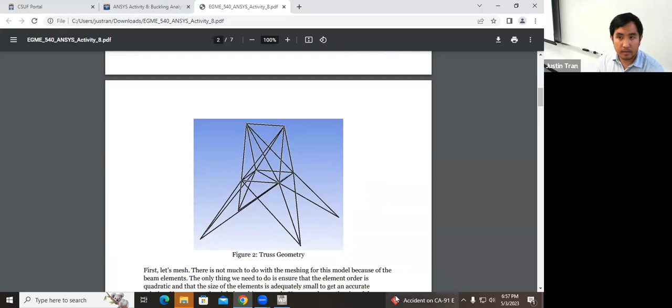Dr. Tran, if you're not in the middle of a discussion, can I ask a question? Sure. May you scroll down on your screen for assignment 8? Okay, I'll tell you when to stop. Keep on going, I just want to see the units. Show me the chart. Hang on. Sorry.

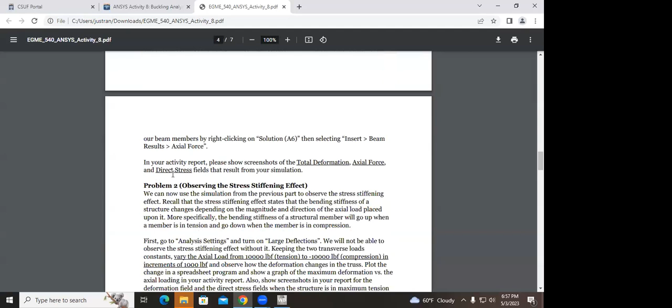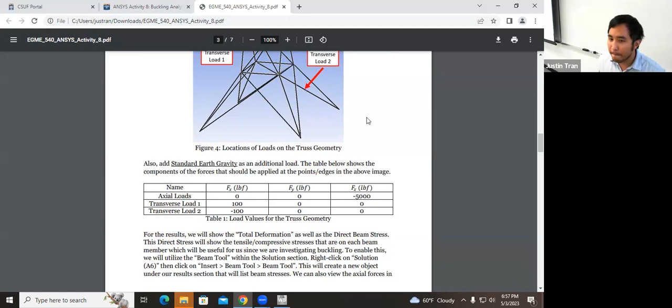So you're giving us, okay go up. You're giving us English units here, pound force. Do you want our submission to be in English units or SI units? Just be consistent. I gave it to you here in pound force just because I think that's the default for this geometry, but just be consistent throughout your report. It doesn't matter. Sounds good, thank you sir.

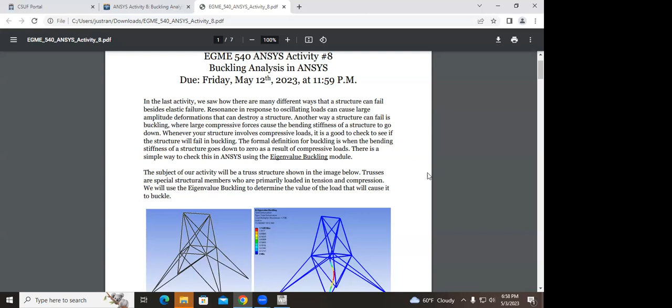Dr. Tran, I also want to say thank you for making the assignment due Friday instead of Wednesday. Oh sure, yeah, it's more doable. Oh yeah, yeah, I know it's a busy time, so I think having more flexibility is always a good thing.

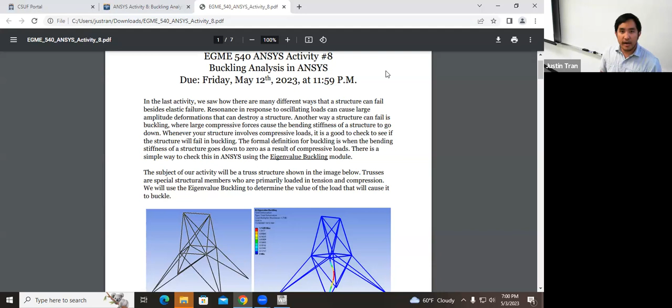So this is activity 8, the last one we're going to do together, the last time I'll be talking up here for the full time too. Just like I talked about on Monday, the plan for next week is that there's no plan. I know the final project is looming up very soon, so I wanted to dedicate the two class lectures for next week to be like a project workshop, or extended office hours if you want to think of it that way. So if you have questions on the final project, if you're having trouble with the simulation, or you have questions on how to apply one of these activities to the final project, that's the perfect time to ask.

I'm doing something similar for my other class too, 417. What I've been telling my students is that I know throughout the semester it's hard to start on these projects, kind of when we posted this a month ago. But I would really encourage you to at least get started on it before the class sessions next week, just so that you can come with questions.

After next week, I'll still have my office hours, so even during finals week I'll still have office hours. They'll probably be virtual, just because I live far from campus, but I do want to make myself available. But the best time to get a hold of me, where you'll have my undivided attention and I'll be there for sure, is in the lectures next week and in the regularly scheduled office hours. Definitely take advantage of that. So if you come to class with questions next week, I'll do my best to help you out. All right, so that's the plan for next week.

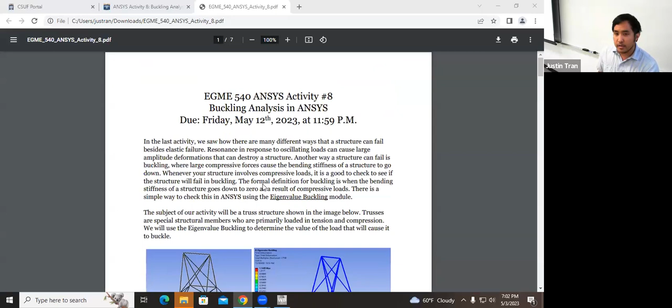Just like the normal procedure for the activity: go to the Canvas site, download the project instructions, download the CAD file, open up Workbench, and we can get started from there. Are there any questions I can answer about this activity, or the plan for next week, or anything in general before we start?

Okay, let's go and get started. Let me go ahead and open up Workbench.

Just like last week, our first step here is going to be a static structural analysis. Just like modal analysis, the eigenvalue buckling actually builds directly off static structural. So let's go ahead and take static structural and drag it to the workspace here.

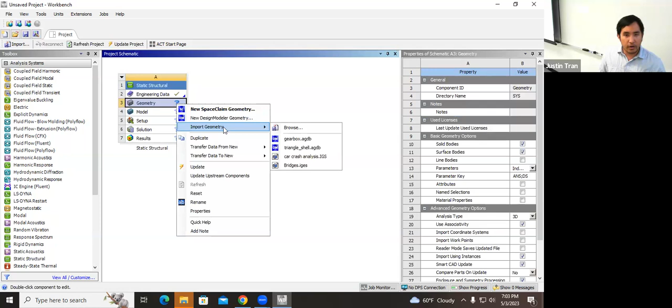We're going to import our geometry. So we're going to right click on geometry, go ahead and click browse, and we're going to download and import the 3D truss geometry that I uploaded onto Canvas.

I don't believe we're doing any change in material, so we're just going to stick with structural steel. Let's go ahead and double click on model right here and open up ANSYS mechanical.

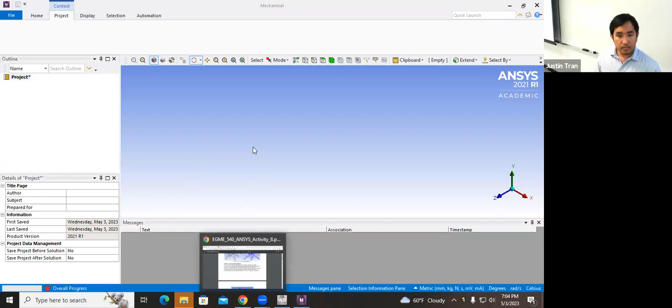When you open up ANSYS mechanical, you should be able to see the geometry. It may be a little bit hard to see, but the reason the geometry looks a little bit weird is because it's already been converted to beams. So what we have here is a collection of 1D beam elements, mostly just to keep the costs down.

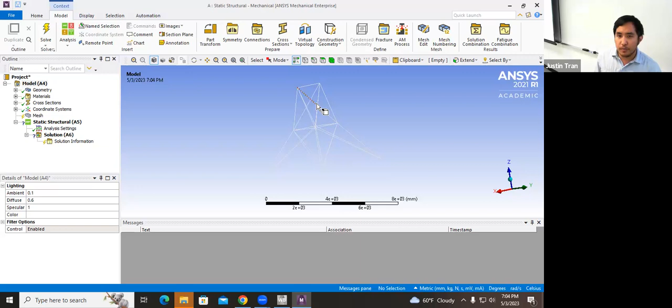And this is kind of the perfect geometry for beams too. Let me see if I can display it here. Oh, it doesn't even show. But if we were to show this, you would actually see a bunch of slender elements all kind of linked together like this. So this is kind of the quintessential beam example here.

So first thing we're going to do is we're going to mesh. We're not going to pay too much attention to the mesh here. The only thing we're going to make sure of is that we have quadratic elements. And for the element size, let me change the units here.

Let me go to English units, let's go to inches actually. And so let me make the element size here. Let's try an element size of 1 inch, and let's see how many elements that produces.

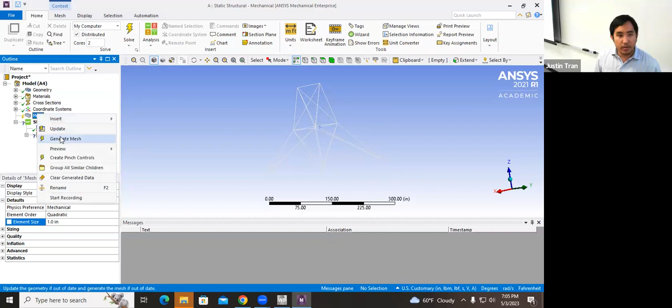We don't have to be too picky with the mesh here, we just have to get something decent. If you use an element size of 1 inch, you end up with about 3,000 elements. And I think in the project specifications, it says 5,000 elements is good. So let's go ahead and cut this down to 1/2 inch and let's see what that looks like.

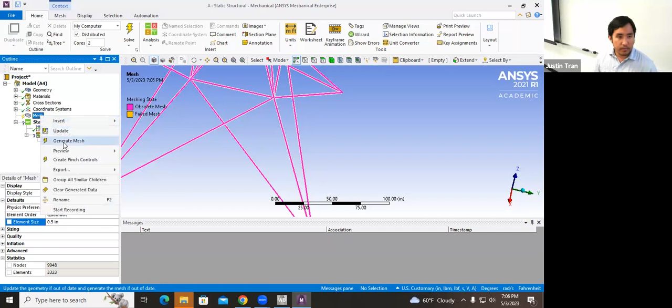With 1/2 inch, we have a number of elements of 6,000. So let's cut this down a bit more. Let's try 0.3 inches. And for a mesh size of 0.3 inches, we end up with 11,000 elements.

And that's plenty. You don't have to be too picky with the mesh here, as long as you're somewhere above 5,000 elements, I think you're going to be good. But if you want to follow along with me, I used a mesh size of 0.3 inches. Everyone is able to load this geometry and get a mesh on this.

All right, so far pretty straightforward. Hopefully that is good. So the next thing we're going to do is we're going to apply our loads and constraints.

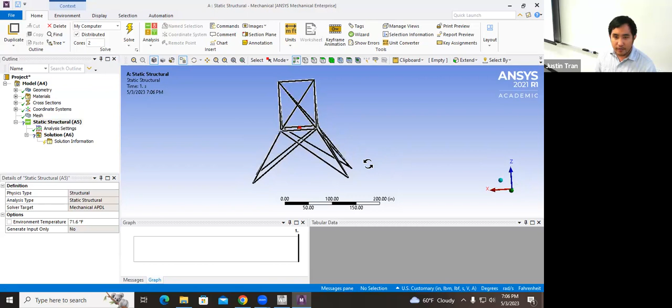If the geometry is a little bit unclear, basically what's happening is that this geometry is sitting like this, and the ground is down here. And so the first thing we're going to do is we're going to apply fixed supports.

We're going to apply fixed support on all 4 legs here, on the very bottom. So let's go ahead and insert our fixed support. And then I'm going to switch to vertex mode just to make it a little bit easier to click. And I'm going to click the bottoms of the 4 legs just like that. So now the geometry is fixed.

So now we're going to apply the loads. There are 3 loads that we're going to apply here. Let me see, okay, I think this is okay here. So let me go ahead and draw out the 3 loads that we're going to apply.

So the first load is actually a combined load, but I kind of lump them together because they both do the same thing. The first load that we're going to apply is a downward force on the very top of the structure. So this is load 1. If you're following along with the instructions, this is the axial load right here.

I'm not going to do that. I'm not going to write in serial killer handwriting, and so. Okay, so we'll call these load 1. Okay. So those 2 go together.

Okay. The next load that we're going to apply is on this element right here. Okay, so we're going to have another load that kind of goes horizontal just like that. Okay. So this is going to be transverse load 1. So this is going to be load number 2, I guess. Okay.

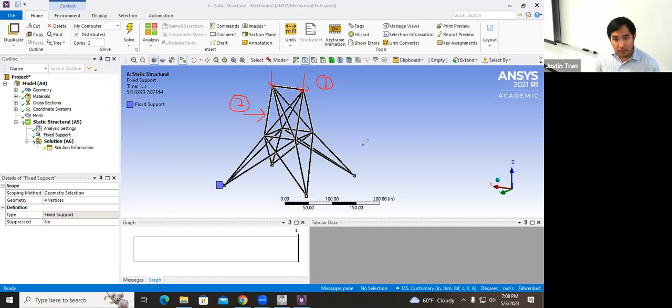Right. And then we're also going to have a load on this element right here, or this beam right here. Okay. It's a little bit hard to see, but I think the figure in the instructions makes it a little bit more clear. So that's going to be load number 3. Okay. All right, so those are the 3 loads.

And so the main thing to note here is that load 1, the 2 loads on top, this is going to put our structure in compression. Okay. And so that's going to be our main driving force for the buckling. Okay? And so it's going to be our main driving force for the stress stiffening. And then for loads 2 and 3, these are smaller loads that we're applying just on the sides to basically induce buckling.

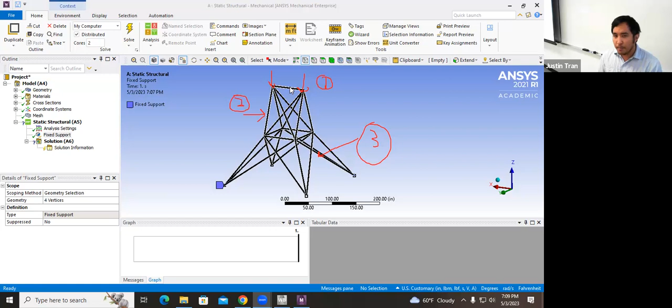So load 1, that's actually going to be the one that causes the bending stiffness of the beam to go down, just like we talked about on Monday. And the only reason we add loads 2 and 3 is just to make sure that we do actually observe buckling, because you do need to have some kind of bending force or transverse force in order to observe that.

Okay. So let's go ahead and apply this. I'm going to right click here and insert a force. Let's add the axial forces first. So I'm going to click on the top 2 points on the structure. Let's go ahead and apply. Okay. I'm going to change this to components, just so we can apply force in the Z direction.

And if you go off the instructions on the PDF, the magnitude and direction of that force is going to be minus 5,000 pounds. Okay. So this force right here, let's go ahead and rename it. So this is going to be our axial force. In other words, it's our compressive force. Either one is fine.

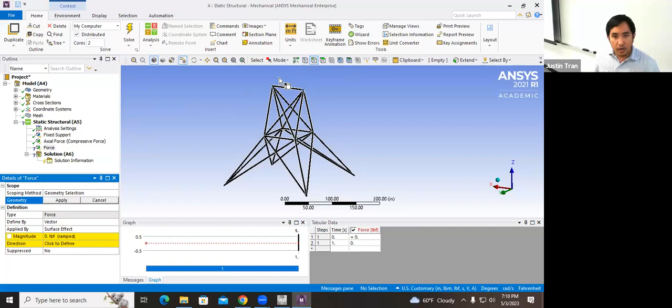Next, let's add in our 2 transverse forces. So we're going to add a transverse force. We're going to apply it to the entire beam right here, because it's hard to select just one point on that beam, because the whole beam is kind of one piece here. So I'm going to select this beam right here, and let's go ahead and change it to components.

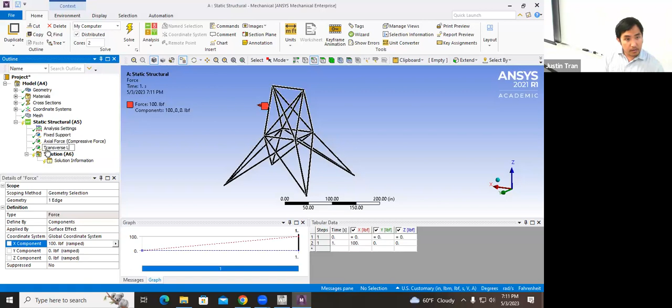All right. And so this will be transverse load 1. This is going to have a magnitude of 100 pounds. So let's go ahead and rename this. This will be transverse load 1. All right. And then let's go ahead and apply transverse load 2.

So let's go ahead and apply another force. And so this is going to be applied on this member right here. Okay. Great. Let's do components, and this one will be in the minus X direction, so minus 100. Okay. So this will be transverse load 2.

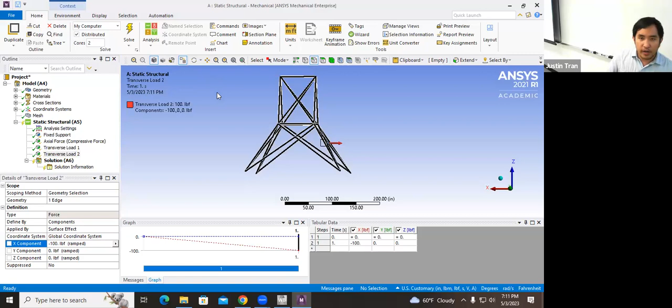Okay. So in total, you should have 4 boundary conditions. You should have the fixed support on the bottoms of the 4 legs. You should have the axial forces up top, that's our compressive force, and then our two transverse loads, one on the upper part of the structure, and then one on the bottom part of the structure. Okay. All right. Any questions on this?

Okay. All right. So for our results, let's go ahead and look at the total deformation. And then we're also going to turn on the beam tool. The beam tool is something special for a structure made of beams like this. What the beam tool will tell us is basically any kind of compressive or tensile stresses on the beam. So it basically shows the same thing as the equivalent stress, but it shows it as either a tensile or compressive stress on the beam, which is useful in this case.

Okay. And so to do that, we're going to right click on solution A6. We're going to go to insert, and then we're going to go down to beam tool, and then you're going to select beam tool. Right. So I have no idea why it's a menu when it's just one thing. Okay. And so let's go ahead and select that.

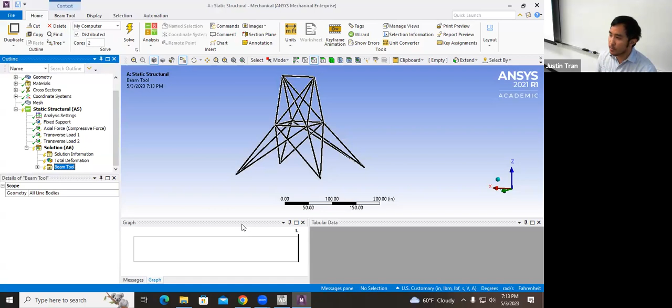Okay. Yeah. ANSYS will read which component of the beam. Exactly. Yes. And so because we've already converted these elements or these structures to beams, it already recognizes those as beams. But for a structure where part of it is beam, part of it's not, this will only apply to those beams. Okay. All right. And so let's go ahead and run this.

Okay, so we'll get our first preliminary simulation results. So you have the total deformation here, and if you're having trouble seeing this, right now it's a little bit hard to see because of all the elements here. That's what all these black outlines are. So we can get rid of those. If you want to get rid of those, you can go to results here and go to edges, and you can click on no wireframe. So that's how you would turn off the edges of the elements just to make it a little bit easier to see, right? And so for the total deformation, you should get a plot like this, okay?

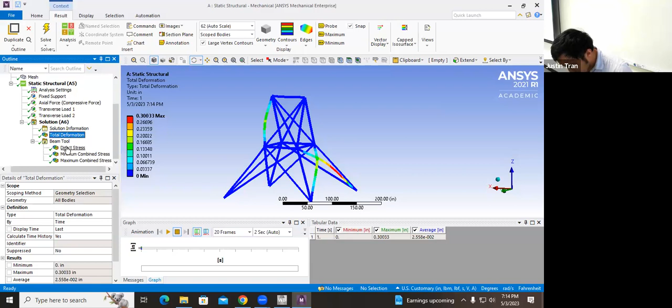And then under the beam tool, you can see here that we have a few results here, okay? Oh, let's do one more thing, actually, sorry. For one more result that we can show, just to make sure that we are seeing the axial results or axial forces, we can right click on solution A6, go to insert, go down to beam results, and then click on axial force. Okay, so let's go ahead and solve it one more time, just so we can see the axial forces.

Okay. And so for the axial forces, you can see which sections here are in compression and which ones are in tension. So for the axial force here, the way that you read these results, you can see here that we have both positive and negative results. For the results that are positive in red, those are the beams that are in tension. Typically for a tensile force or a tensile stress, we show it as a positive number.

And then for the results that are negative here, the ones that are dark blue, those are the elements that are in compression. Sorry. And so you can see here for all the dark blue beams, those are in compression with a load of about 1,000 pounds. Okay. Yellows are neutral. Yeah, yellows are almost neutral. So between yellow and green, those are almost no stress.

All right. So the main results that you should see here are the total deformation. Total deformation is of course important. The axial force is something that is useful. And then you can also look at the direct stress. Axial force and direct stress are basically the same thing. If you can see me switching between these, the colors aren't changing at all. It's just the units that it presents it to you with are different.

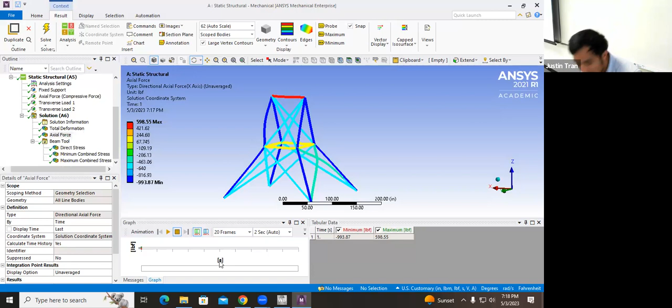Okay, so the first thing we're going to do is we need to enable the stress stiffening, and so you're basically going to go to analysis settings up here. Okay, and so under static structural A5, you can see here that there is basically a section here for analysis settings. Okay, and we need to turn on large deflections. Okay, and so when you go to analysis settings here and you go to nonlinear controls. Okay, actually, where is it? Let's see.

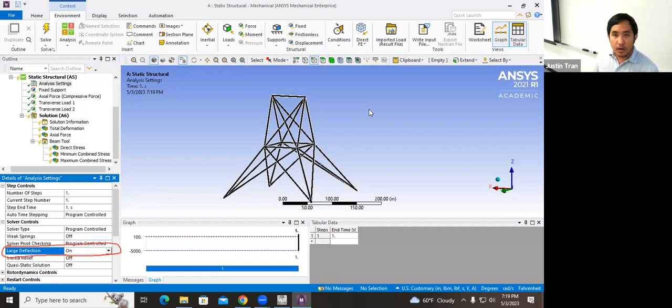Oh, right here. Okay, and so under analysis settings, if you go to solver controls, you can see here there's one setting called large deflections. Okay. And so by default, it's off, right? Because if you turn on large deflections, it increases the cost of the simulation. But without the large deflections on, we wouldn't be able to see kind of the stress stiffening effect. Okay, so let's go ahead and turn it on. And let's go ahead and rerun the simulation and see what effect that has on our results.

Okay, so with the large deflection turned on, it's a little bit subtle, but what you should see is that the deformation that you observe increased by almost about 10%. And so it used to be about 0.30 before, now it's about 0.32, okay? And essentially what's happening is that we're basically enabling all the nonlinear effects in this simulation, okay? Which normally, when you enable nonlinear effects, it's going to increase the cost of the simulation pretty significantly. But because we have a structure here of all beams, it's pretty cheap, okay?

Okay. And so you can see here that under the current configuration, we have a max total deformation of about 0.327, okay? And that's occurring here on this beam here, one of the beams that we applied our transverse stress, right? Let me show you something. So go ahead and memorize that 0.327. And what I'm going to do here is I'm going to increase the value of this axial force, okay? Because right now we're applying a compressive force of about 5,000 pounds. Let me double this so you can kind of see what's going to happen. Okay.

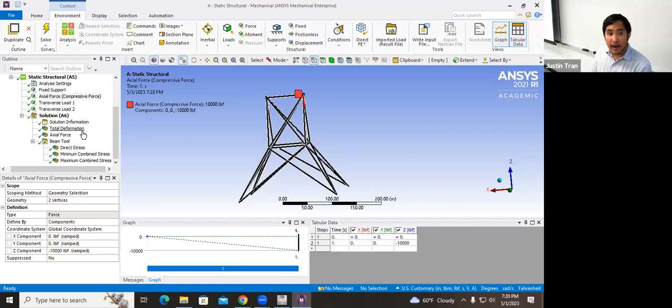Okay. And so I've doubled our compressive stress here. And so by our logic, since we're applying more compressive stress onto the structure, the structure should buckle more. Right? And so the deformation that we observe should be higher than it was before. And in fact, it is, right? So you can see here that when we basically double the amount of compressive force, the maximum deformation here increases to almost about 0.37. So it's a fairly significant difference.

Okay. All right. And so for this part of the activity, problem 2, it'll probably take you guys maybe 10, 15 minutes to gather all this data. I want you to basically create a line plot. Okay. And so I want you guys to create a line plot in Excel, where on the x-axis we have the axial force. And on the vertical axis, I want you to plot the deformation.

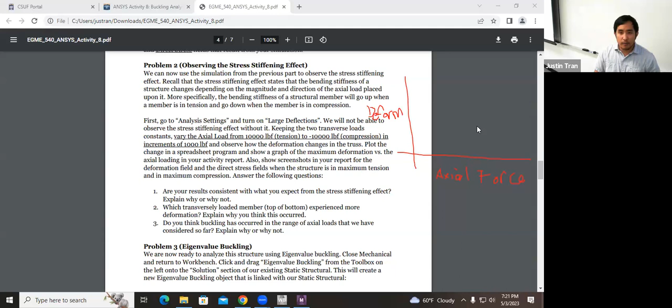And so for various values of the compressive force, I want you to basically change that axial load. And so I want you to go from basically minus 10,000 pounds to 10,000 pounds. And I want you to plot out what the maximum deformation is going to be. Okay. And what you should see, I can bring back the pen here. What you should see is that the trend line should kind of go down. Okay.

And so at minus 10,000, you should see a maximum of the compressive deformation. But then as you change that load to tensile, the deformation will go down because of that stress stiffening effect. And so you're going to have to use Excel to kind of plot this out, but I want you to change that axial force and plot it out just so that you can see. So you should have about 20 data points overall, because I want you to change it in increments of 1,000 pound force.

Any questions on that? Does that kind of make sense for everybody? Okay, so I'll give you guys maybe like 10, 15, 20 minutes to get all that data and plot it out. You can use Excel, you can use Google Sheets, it doesn't matter to me. You can even draw it by hand if you're confident in that. But why don't you go ahead and do that just so you can see the stress stiffening effect in action.

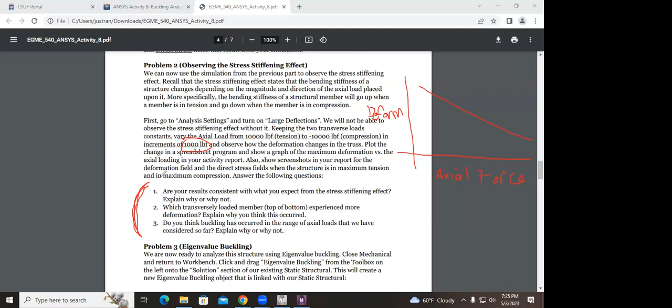And then also for this question here, you can see I have additional questions that you can answer, but you can save those for when you write up the report, so you don't have to answer them just yet. Professor? Wait a second. Oh, analysis settings. It is under static structural A5. This one right here. And then you want large deflections right here.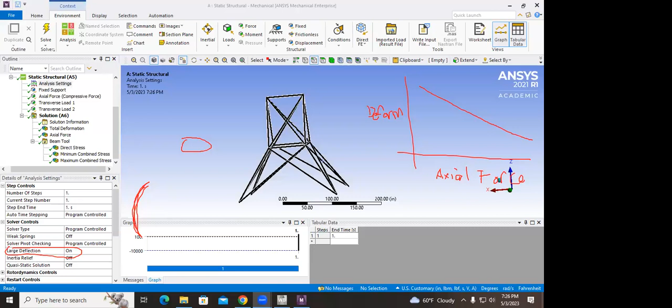Sorry, Chris, you were saying something? Yeah, I showed up a little late. Is it for the axial force and transverse load, is it just force? Yes, those are just forces. For the transverse, are we applying it to the beam or a point? The beam, the entire beam. Anywhere specifically on the beam? Just select the whole beam. I think you can only select the entire beam, so just like that.

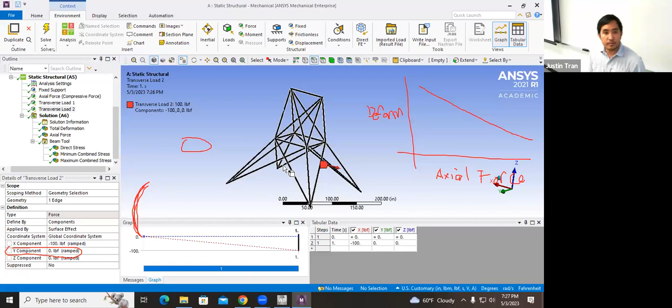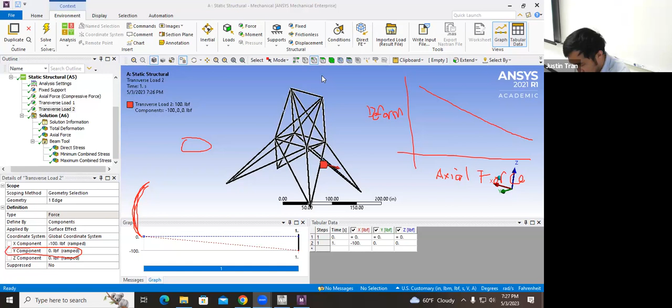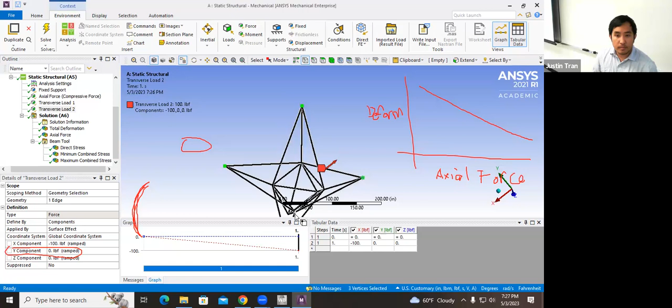Transverse load 2 location? Yeah, for transverse load 2, it's on one of the legs basically. So just somewhere on one of these legs on the bottom. Because there's so much symmetry in this structure, it doesn't matter too much which one you apply it on, but just one of those bottom legs. And where are we applying the fixed support? The base, those 4 points? Yeah, so basically all the bottoms of the legs. So all 4 of these points here. Yeah, those, oops, not that one.

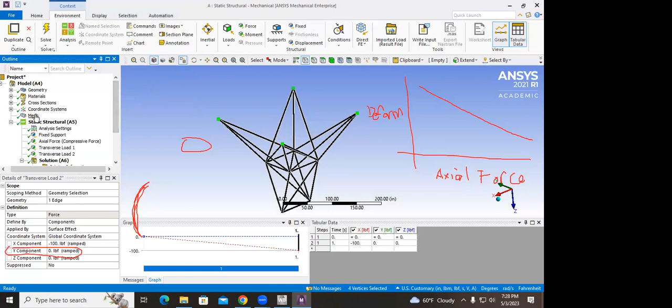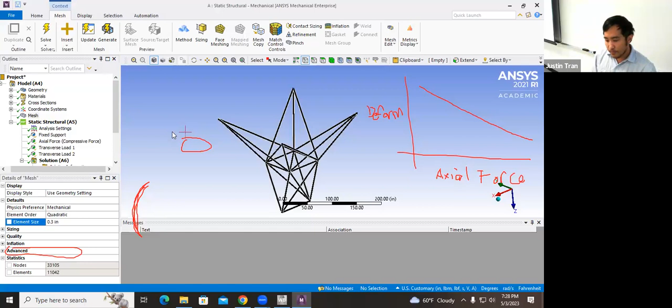And any specific requirements for meshing? The mesh, you don't have to be too careful with this one. Do you want a method and a sizing? No. Because here it says 7,500, what was it? 7,500 elements. So you can just change it by the global settings here. As long as the element order is quadratic under mesh, and I used an element size of 0.3 inches, but anything like 1 inch or 0.5 inches is fine. We don't need too big of a mesh here.

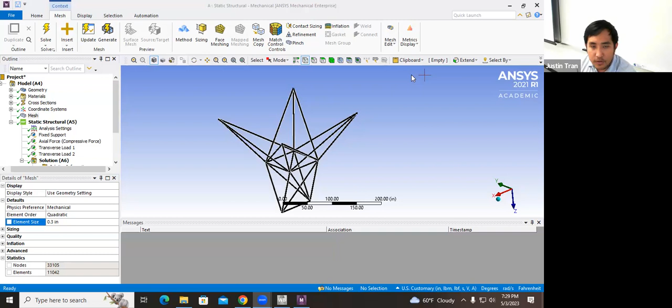All right, so how's everyone doing getting that plot? It's a lot of data points. Materials, structural steel? Yes. Anything specific about the geometry we need to worry about? No, everything is made of beams already, so it's already prepped for you. There's nothing too special with the material or geometry here.

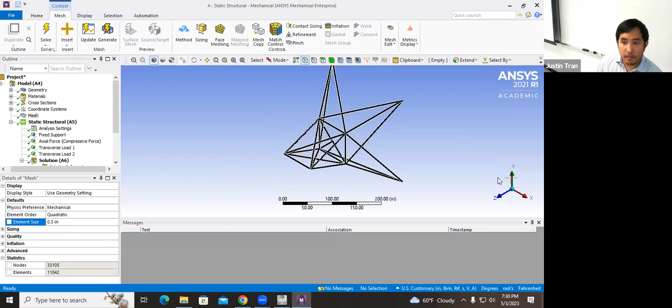Is there any way to get the display to put it right side up instead of all cattywampus? You can. I think the best way would be to use the coordinate axis here in the bottom right to click to set it to one thing, and then just rotate with your mouse to get it to a good position. Okay.

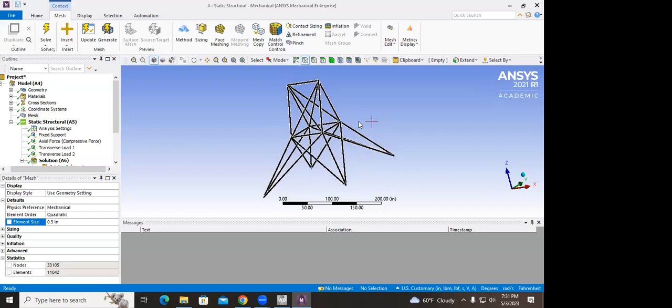Oh, Chris, there is one thing you have to do. Before you run the simulation, you're going to go to analysis settings here under static structural A5. And then there's a setting down here for large deflection, and you're going to want to turn that one on. Yeah, I heard that and forgot to do it. Okay. Yeah, just make sure you do that before you start doing problem 2.

If I fail to do that before I start, does it explode? Oh, no, it's fine. It just modifies the results a little bit. If you turn that off, it's going to assume that everything is linear, and so essentially it'll underestimate the deformations because buckling wouldn't be able to take place. So in order for you to observe buckling, you have to turn that large deflection on. Okay.

Since we can't do 0, do you want some low number? Oh, you can skip over 0. Yeah. It'd be a fairly linear graph. 0 is kind of right in between.

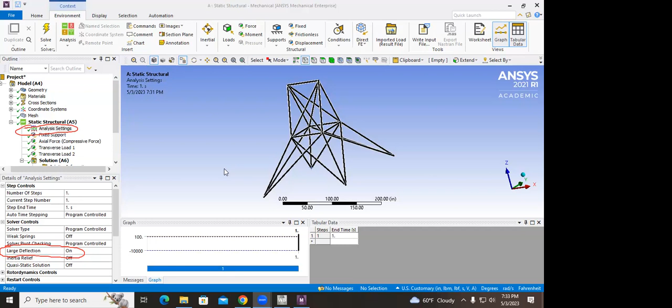I have a question. Sure. We're dropping one of the activities, right? Yes. The lowest one is dropped automatically. So if we've done 7 already, we can drop this one. Correct. Yeah, this one is one of the easier features though, and a lot of people end up using this one for their final project. So this just gives you practice for it. But in terms of your grade, if you did all the other activities and did well in them, then you don't have to do this one. It'll be dropped automatically.

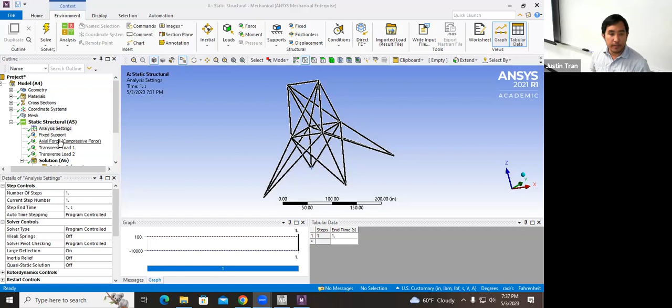All right. So that was buckling the hard way. I kind of made that a little bit painful on purpose, just so that you can see that normally it's very painful to do this kind of buckling analysis naively. So now I'm going to show you how to do buckling the easy way. We're basically going to use another analysis type, just like modal analysis. So we're going to need to close ANSYS Mechanical.

But before we do that, I want you guys to go to your axial force here and make sure that the force you're applying is compressive, okay? The actual value doesn't really matter too much. You just want to make sure that it's a negative number, like a negative 1,000 or a negative 100, because the next step that we're going to do depends on that being compressive.

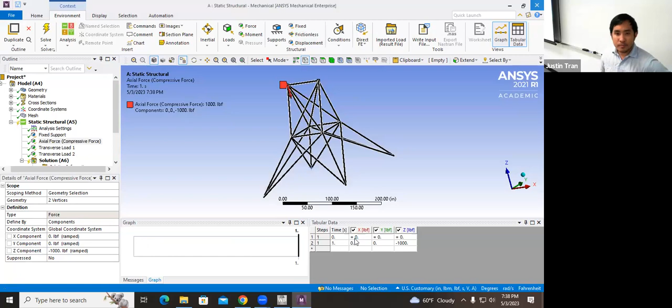I'll say it again, make sure your axial force here is compressive. Then once you do that, you can go ahead and close ANSYS Mechanical to bring you back to Workbench. Okay. Magnitude doesn't matter, as long as it's compressive.

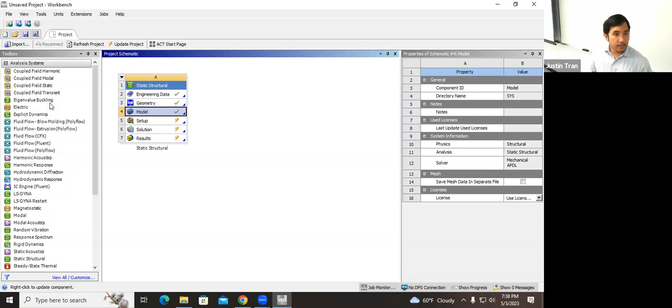Okay. After you've changed it, if you want to get rid of these lightning bolts, you can rerun the simulation, but it doesn't matter too much. The next thing we're going to do is take eigenvalue buckling. It's a different analysis type here from the toolbox. We're going to click and drag eigenvalue buckling, and drag it on top of solution, just like this, okay?

Because what we want to do is link the eigenvalue buckling to our static structural analysis, so it'll inherit all the boundary conditions and such.

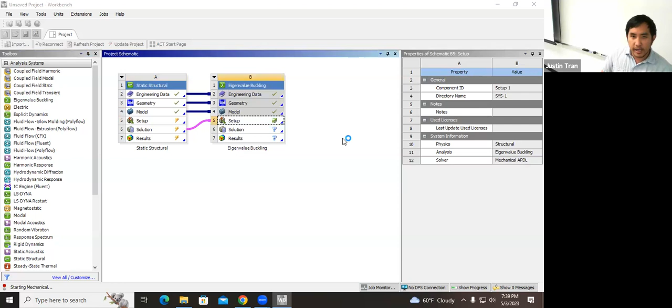After you click and drag eigenvalue buckling onto solution, it should look like this, and you should see the two are linked. It should have the same engineering data, the same geometry, the same model, and the same solution. Once you do that, you can double click on setup for eigenvalue buckling, and that'll open up ANSYS mechanical again.

So this is buckling the easy way. The nice thing about eigenvalue buckling is that it's really kind of a one button solution for buckling. So let's try just solving it as it is, without changing any settings, and let's see what it gives us.

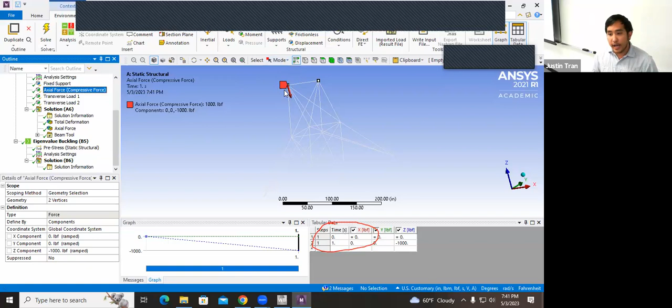Your multipliers are going to be different, and it really depends on what value you chose for your axial force. For me, I chose a force of 1,000 pounds going downwards into the model, and that gives me a load multiplier of about 14.135. If you look at the activity sheet, you can see the load multipliers there are a lot smaller. That's because I probably used a different load value there, and I don't remember what I put for that one.

So you can see here that it's showing us two modes. We can show more, and I think in the activity I asked you to show 6, so let's go ahead and do that. Under the eigenvalue buckling, there's another button for analysis settings, and one of the options there is the maximum modes to find. So let's increase this to 6, and then solve it again.

All right, and so with 6 modes, you can see here that we have six load multipliers here.

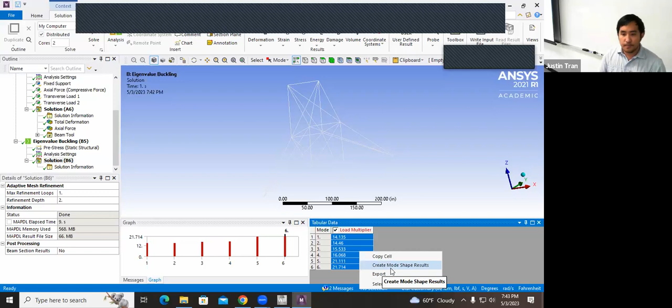The last thing I'll show you here is how to actually display these modes. Remember, the way ANSYS displays buckling is very similar to modal analysis, so when buckling occurs, ANSYS can give you a prediction of exactly how the buckling will occur or what it will look like. The way you can display that is by highlighting all the load multipliers, right clicking, and then clicking the button for create mode shape results. Let's go ahead and click that, and it's going to create 6 deformation fields for you. So let's show what that looks like.

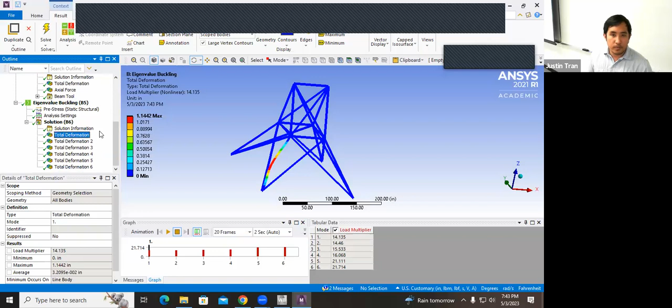You can click on each of the deformation modes and see how the buckling is going to occur. Under my arrangement with the way I have the forces, your transverse forces might be a little different, so your mode shapes might look a little different too. You can go to the different parts here and it'll show you which legs will basically buckle. So basically what this is telling you is that if this structure were to buckle, this leg right here would be the first one to go, the one that's going to collapse before all the others.

All right, and so that's it. That's buckling right there. You can see here, I had you start with buckling the hard way, but this is an easier way to do buckling. So if you want to do a quick and dirty analysis in terms of predicting whether buckling will occur, this is how you would do it. Any questions on this?

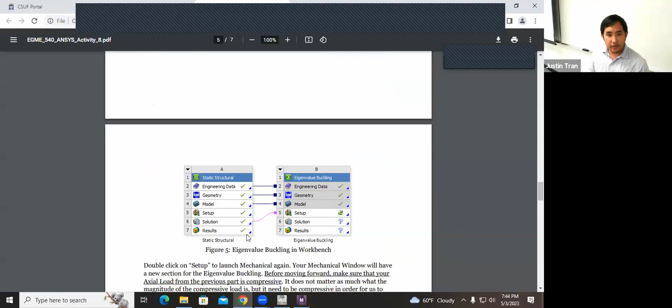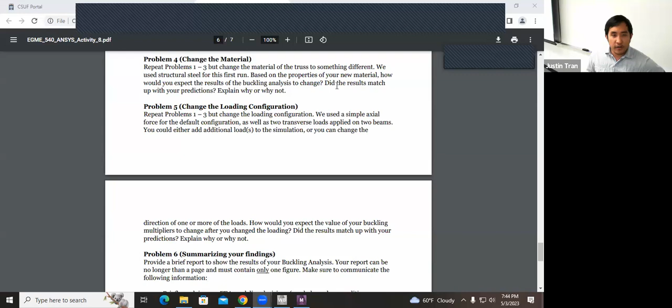Okay, so that's the activity. The rest of the activity here is I basically want you to repeat it. Problem 4 is going to have you change the material, and problem 5 is going to have you change the load configuration. But it can be pretty tedious to do both of these, so I'm going to make a change here where instead of doing both problem 4 or problem 5, you can choose either or. You have to do problems 1 through 3, which is what we did together just now.

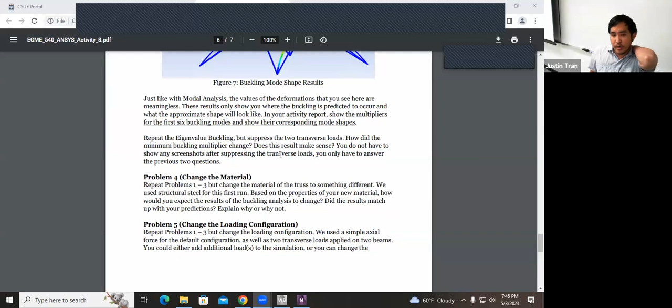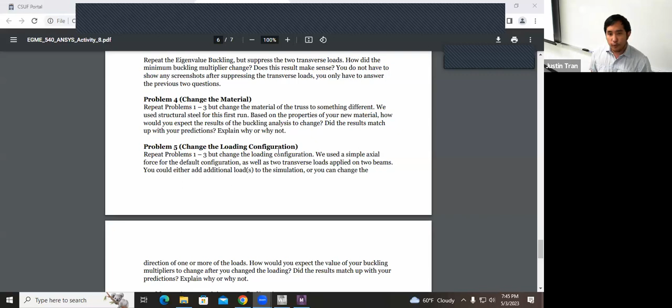But for your activity report and for the rest of class today, you can choose to either do problem 4, where you basically repeat problems 1 through 3 but change the material, from structural steel to something else. Or you can do problem 5 where you change the loading, maybe add an additional axial force or some additional transverse forces. Basically you change the loading to something else.

Dr. Tran, So having said all that, for our homework submission for assignment 8, we could choose problem 4 or problem 5? We could ignore one of those problems? Exactly, right, I want you to just choose one or the other. I'll send an announcement to make it official too. But yeah, for the activity, just choose one or the other, so you don't have to do both.

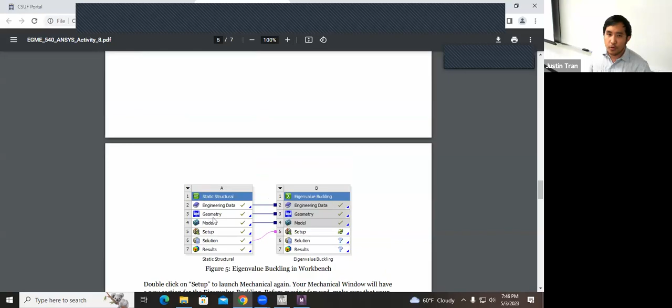All right, and then after that it's just the summary. You guys should be able to knock out all the simulations today with the time remaining. Choose either problem 4 or problem 5. I think the thing that's going to be time consuming is problem 2, which is getting all this stress stiffening data, but once you have that, it's pretty straightforward. Any questions on the rest of the activity?

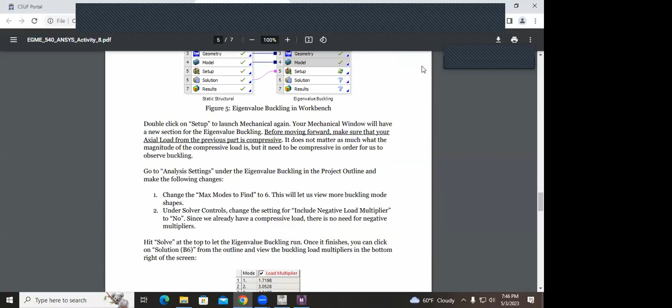Student: I have one. Problem 2 says keep the two transverse loads constant, vary the axial load from 10,000 to negative 10,000 in increments of 1,000, and observe how... any suggestions how to do that? I must have missed the suggested way to do that.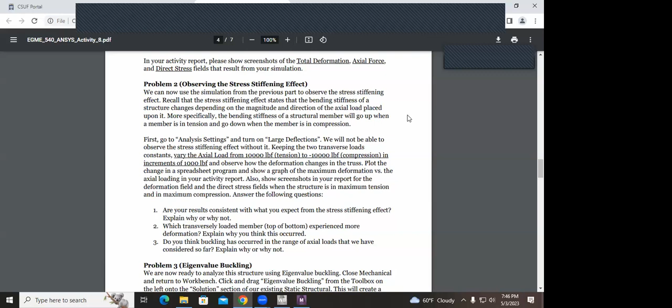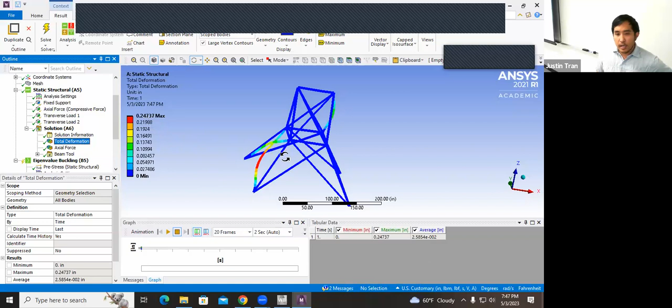Oh yes, so for this part right here, for this axial force, the Z component of this, I want you to vary it from 10,000 to minus 10,000. So you're going to run a simulation with this equal to 10,000, solve it, and you're going to see the total deformation. You're going to see the deformation here is 0.247, and you're going to log that into a spreadsheet. So for an axial force of 10,000, you get this deformation.

And then I want you to change this from 10,000 to 9,000, and just do the same thing. You're going to have basically 20 points of data where you see that the deformation is going to change as you change the load.

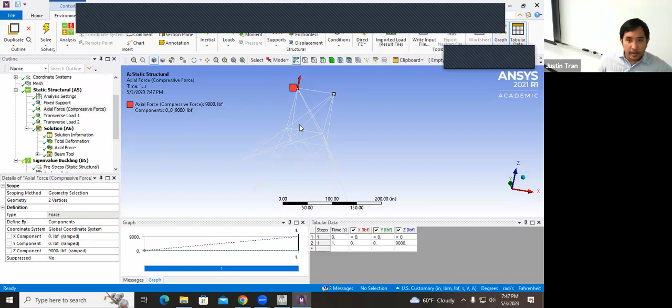Student: Is there a way to do that in ANSYS instead of doing it manually? I think so, but for something like this, it's better to just do it manually. Yeah, but there is a way to automate stuff in ANSYS, I'm just not aware of it.

Yeah, and basically what you're seeing here is that the load we're varying is kind of a force that's pushing up top, right? But the deformation that you're seeing is actually a bending mode. So the difference in the deformation you're seeing is because of stress stiffening and buckling. Even though this deformation goes perpendicular to the part, the main cause of it is the change in the compressive or tensile load.

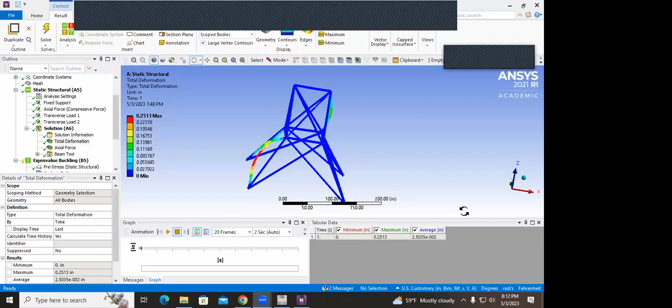Professor, I just have a quick question in regards to activity 7. Sure. For problem 3, when it says change the material for one that is stiffer, i.e. higher Young's modulus, and one that is lower, when it says show all 6 deformation fields, are you referring to a specific one, whether it's pre-stressed or stress-free? Either, so it can be pre-stressed or stress-free. I think stress-free will be a bit easier to do. And do you want us to show both materials, i.e. 12? Yes, both materials. Okay. Perfect, thank you.

I think I'm the only one here, so. But yeah, that answers my question, Professor. Okay, thank you very much. Have a good night. I'll see you on Monday. See you Monday. Take care.